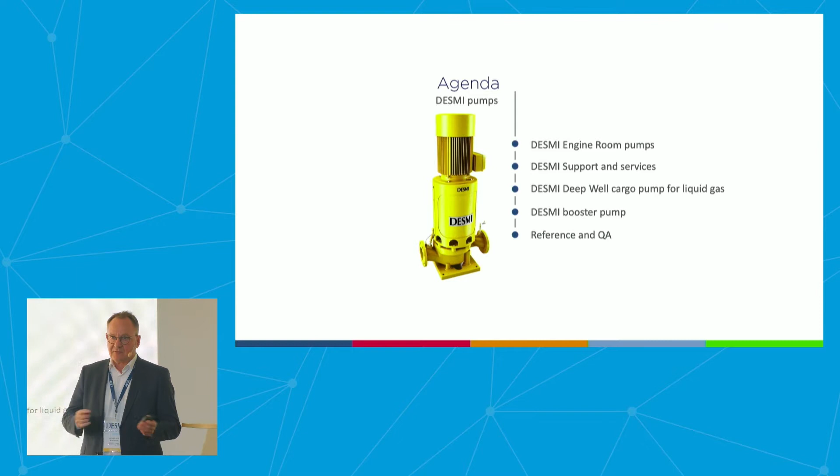Then we go into the deep well cargo system for liquid gases, and then a few slides concerning the booster pumps, which are closely associated with the cargo pumps.

DESMI is a company with a history of more than 185 years. They have been in the market in different segments and different areas. In the marine industry, they have been working within pumping or fluid technology for more than 50 years.

We have more than 100 pumps for different applications suitable for the engine room and related equipment. We supply complete pump packages to shipyards in Asia, Europe and many other places. We also do a lot of replacements and services and these kinds of things.

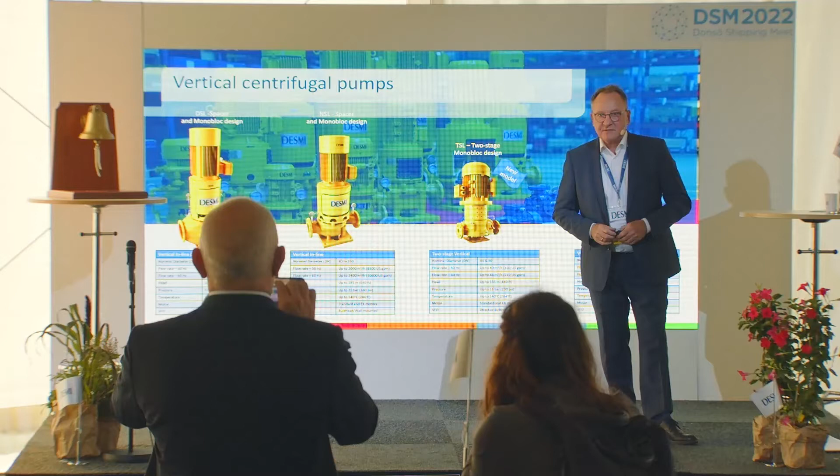This picture shows an overview of our vertical centrifugal pumps suitable for freshwater, seawater, scrubber installations and these kinds of things.

They can be supplied as a cast iron solution, in nickel aluminium, or also as a stainless steel solution.

We have on the left side the biggest, the DSL type, for heavy solutions up to 6,000 cubic meters per hour. Then we have the NSL pumps, medium to large size, which are also very often used for scrubber installations.

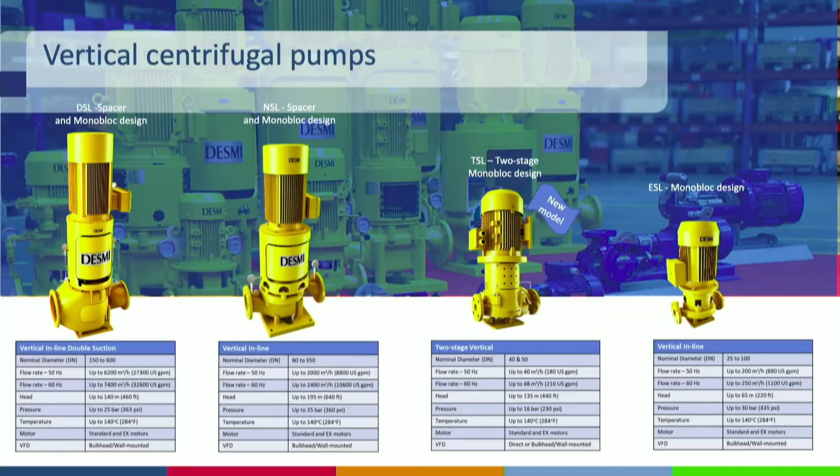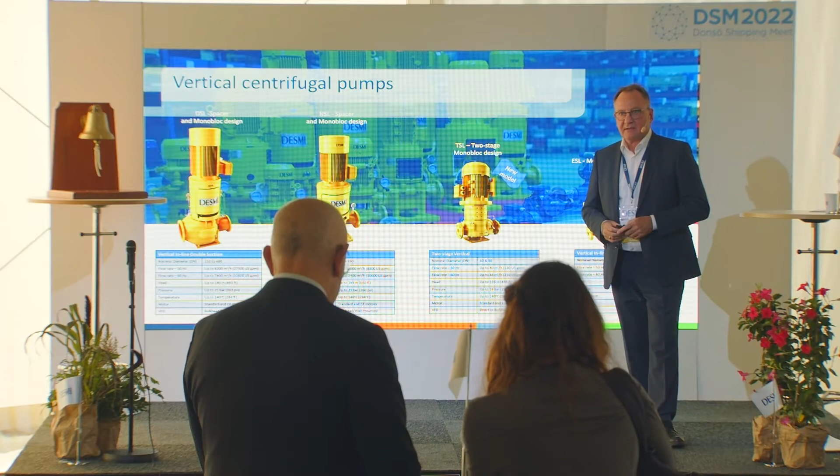One of the newest we have developed is the TSL type, a two-stage pump suitable for medium capacity with high lifting height requirements. The ESL is a more universal pump that can be used in many different applications for small to medium-sized pumping capacities.

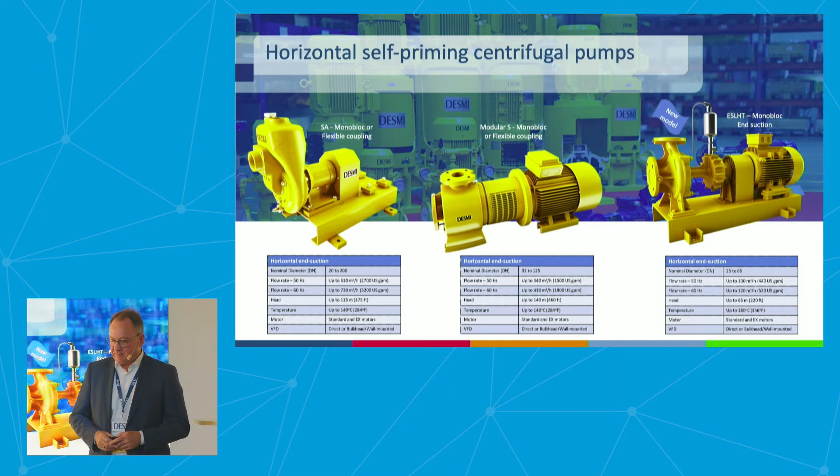The next one is the horizontal execution. The first, the SA type, is one of the oldest pumps we have in our product range. It has a very sturdy design with an open impeller and can be used for gray waters and these kinds of things without any difficulties.

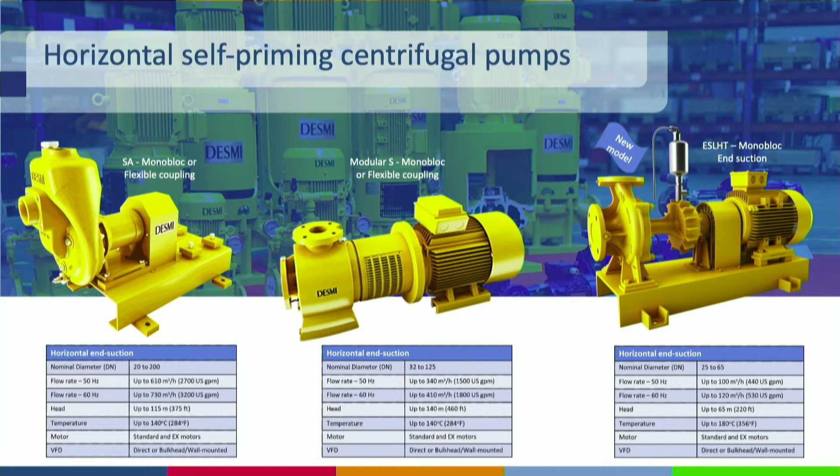Then we have the Modular S, and on the right side the newest solution in our product range: a high temperature centrifugal pump, specially designed for temperatures up to 180 degrees Celsius.

Very suitable for boiler circulation and these kinds of things, and given the requirements we see from shipyards in China and Korea, we expect this pump will be well received by the shipyards.

It's also a different execution compared to what we see in the market today, hence a more reliable pump than what the market is using today.

Coming to a difference, because everybody can supply a pump. It's not high sophisticated technology, and many pump manufacturers can supply a pump and a pump package which are in compliance with the shipyard specifications. The shipyard has absolutely no intentions to supply more than what is necessary and stated in the specification.

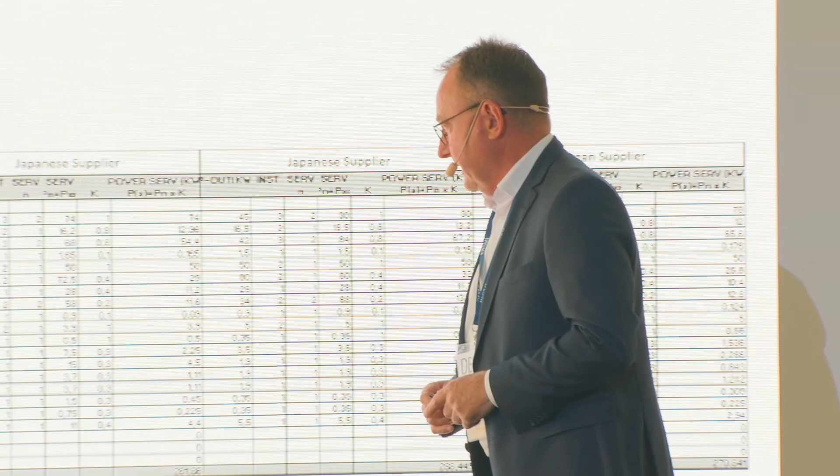On the left side is the duty power on the different pumps. We have the number of pumps installed, the number of pumps in service, and the kilowatt of the pumps in service, and the contingency factor, whether the pumps are running 100%, 80%, or 75%. It's actually showing that with this specification, we use 492 tons of fuel per year for operating the ship, on a constant base.

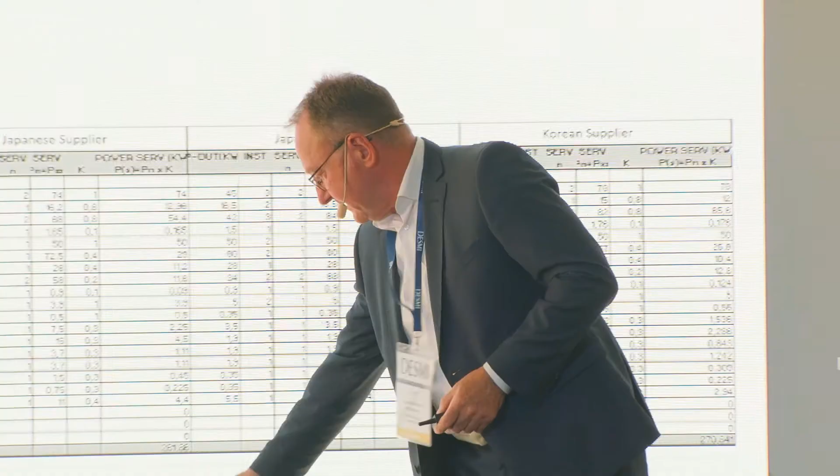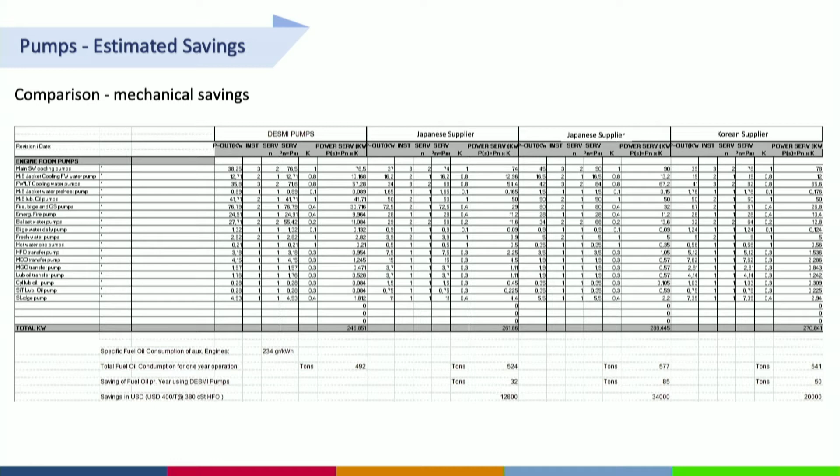But if you compare that with our calculation here against our competitors, the requirement is 32 tons less compared to the Japanese supplier, which is the next best, and then going up to 85 and 50 tons. If you turn that into money, you can see it's actually worth considering a closer discussion and closer cooperation at the design stage.

Then I will just show a short status of our latest development, where we are stepping outside the engine room. We are going to the cargo deck. DESMI has been in cargo pumps for many, many years, but 10 or 12 years ago, DESMI decided, for different reasons, to downgrade the cargo pump business and upgrade something else.

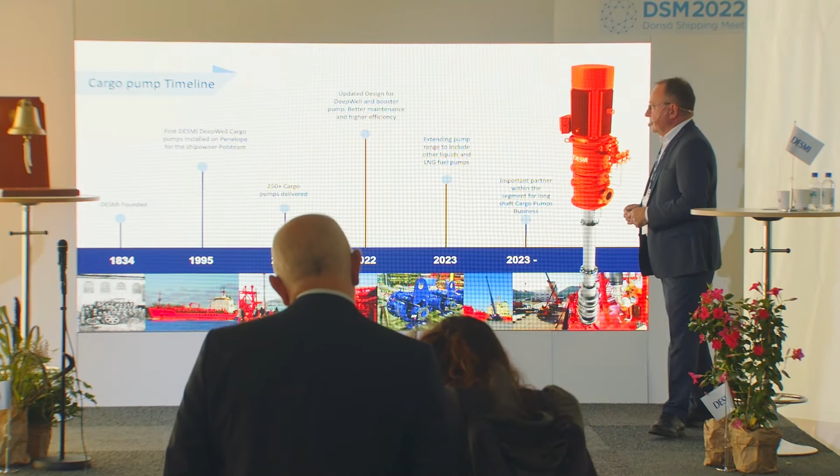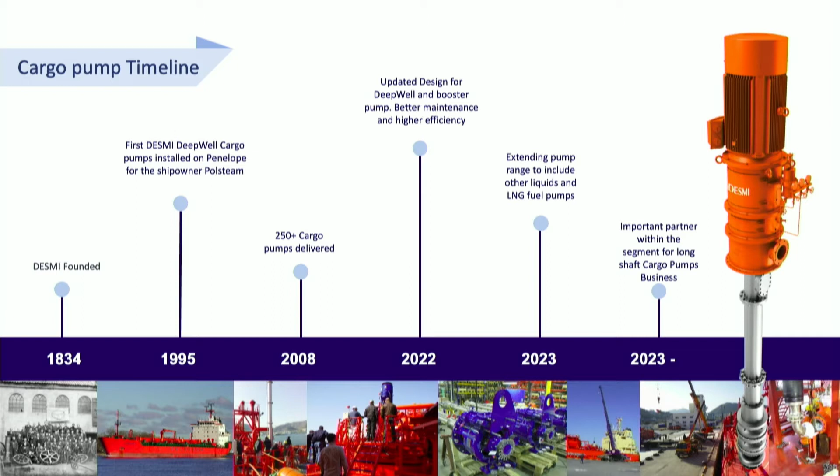But during last year, we decided to intensify the focus on cargo pumps, and we now have a new cargo pump program suitable for the LPG market. The first pump was delivered in 1995, and it is still in operation. I'll show you the reference when we get close to the final slide of this presentation. In total, we have supplied more than 250 cargo pumps.

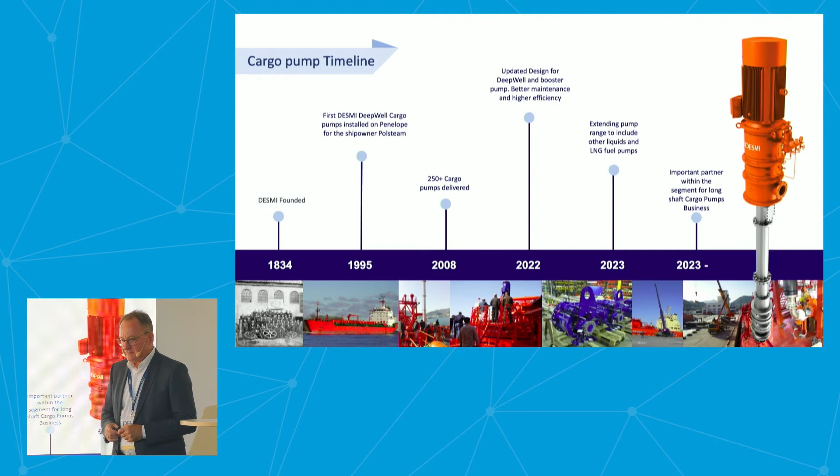Since last year and a half, we have done development on the existing design, utilizing and gaining the benefit from the operating references, and upgrading the design in close cooperation with a well-known service provider in the field. From next year, we will also step into other areas such as LNG as fuel and LNG as bunker pumps for bunker vessels. It is our intention and strategy to be an important partner in the cargo pumping industry going forward from this year.

The cargo pump itself, as you can see here, the orange part is from on deck, and the lower part is submerged into the tank. The production can be up to 800, or the capacity is up to 850 cubic meters per hour, and the lifting height is 160 meters. It can be used in any vessel with a tank pressure up to 18 bar.

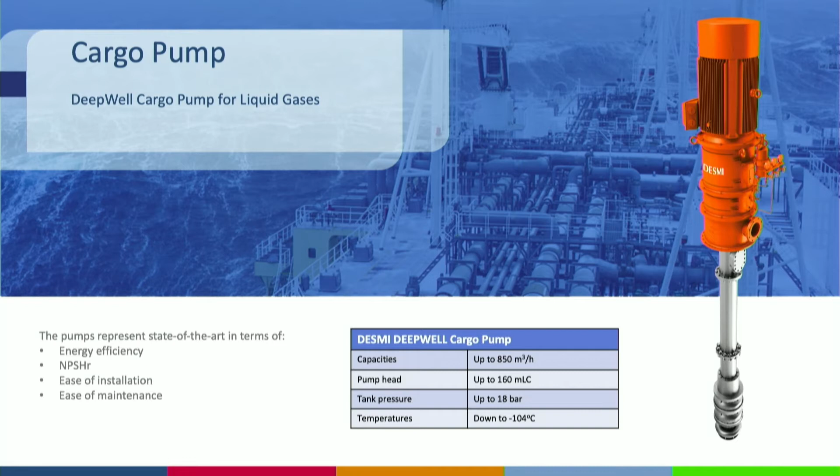So it can be a semi-refrigerated, fully pressurized, or non-pressurized installation. The temperature at this point, we are going down to minus 104. That means we have LPG, ethylene, and those kinds of cargoes in our customer base or range of products.

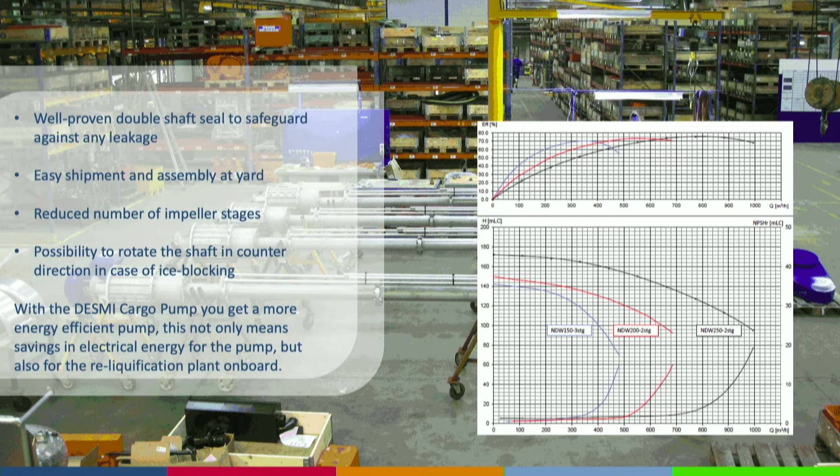The main difference between the old design and the new design: the old design was a welded solution. Here we have a casted solution, and if you do a casted solution, you can also improve the efficiency quite significantly, and hence also reduce the number of stages in the pump.

We can see the small one is a three-stage, and the others are two-stage pumps. If you compare that with the competitors in the field of services, we are at least one stage less compared to our competitors. Less stages means also less maintenance.

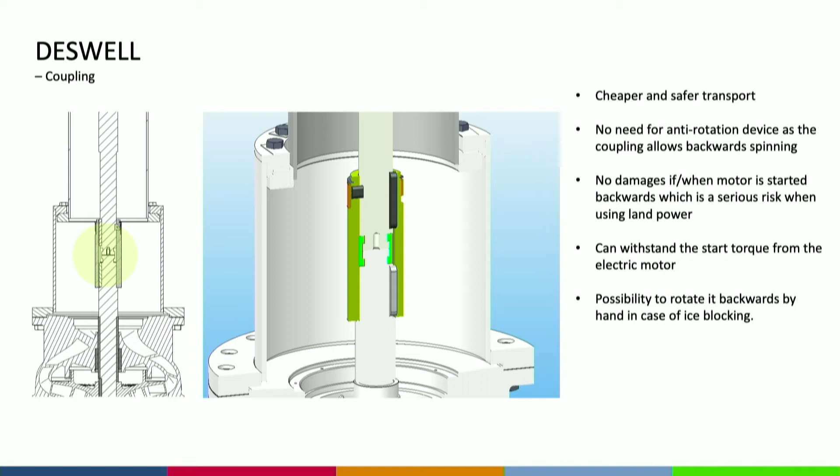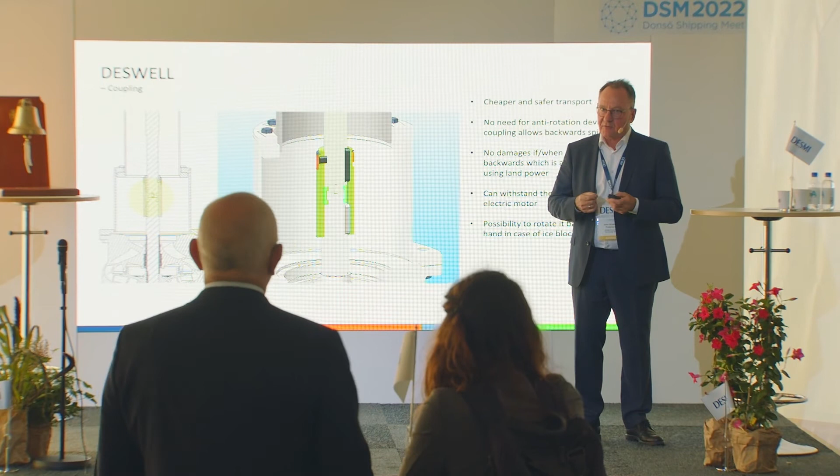Another area where we have spent quite a lot of time and discussion is whether or not we should go from the threaded design, which is well known in the market, to another design where we have a coupling that can actually rotate clockwise and anti-clockwise without having this anti-rotation device installed. It is good for the crew if, for example, there is ice in the pump and it is stuck, then you can actually rotate it both ways without any risk of extending the shaft because of the threaded solution.

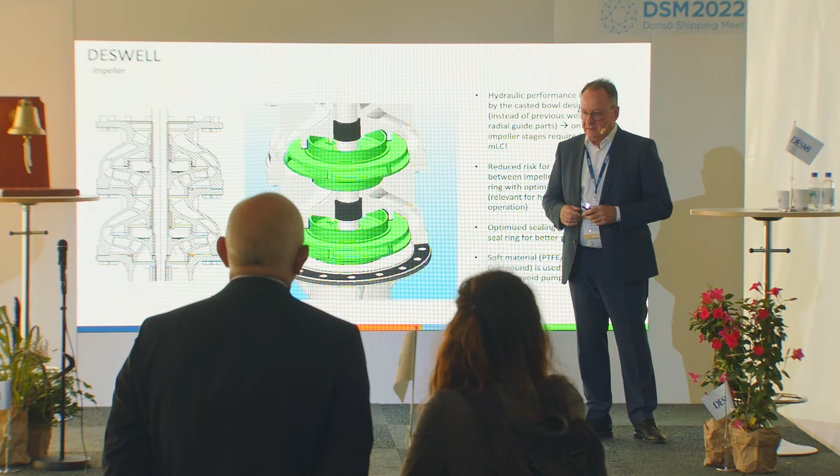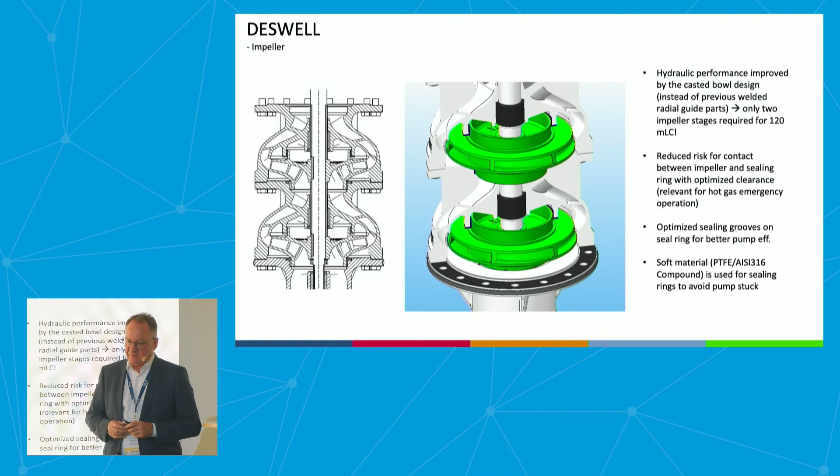As I said before, our stages, our pump has improved hydraulic performance through this casted design compared to the welded design, meaning fewer impellers, fewer stages compared to what the market is seeing today. We have also optimized the sealing, and we have done a number of things with the bowl inside in order to improve the efficiency. We have actually proved that the efficiency is above 80% at the duty points, which is very seldom seen for these kinds of pumps.

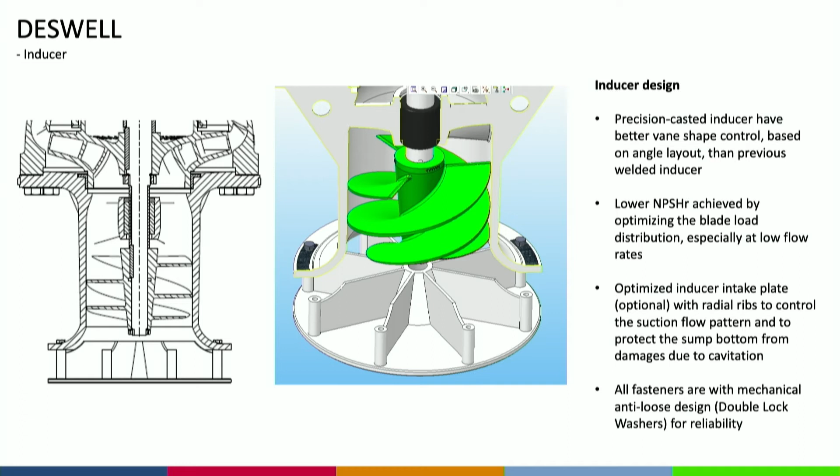At the bottom we have the inducer, and the inducer is important to empty the tank. We have spent a lot of time actually improving the NPSH value. We are pretty honest, we are not able to empty the tank with our pumps, and we will also claim that nobody is actually able to do it. But we have done a lot in order to improve the NPSH value, so the cargo left in the bottom of the tank is an absolute minimum compared to what our competitors are doing.

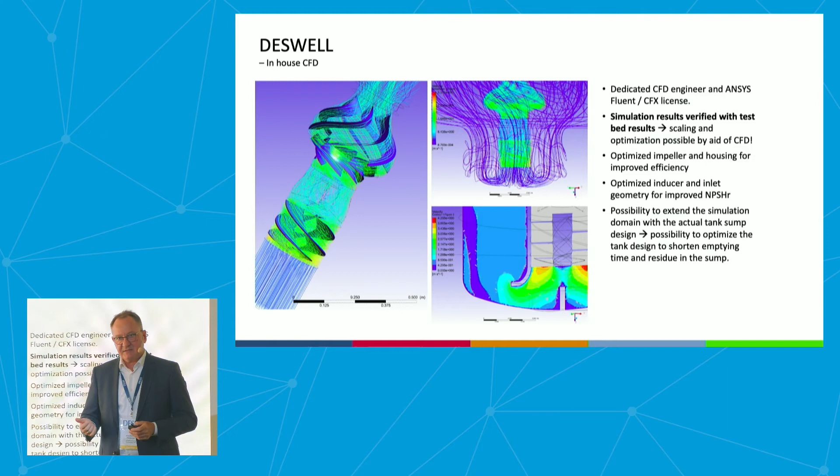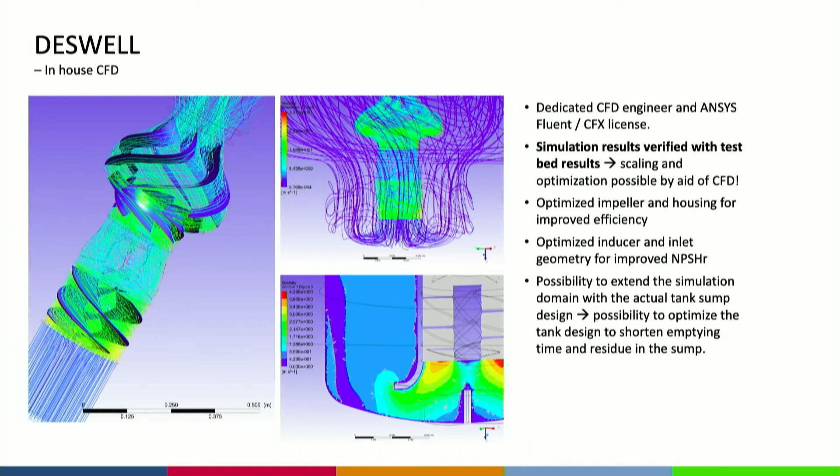Through our dedicated and long experience in the centrifugal business, in the fluid business, we have a lot of tools, and we have spent a lot of time with our CFDs. Through these CFDs, we have proven our pumps are actually 6 to 8% better performing than the CFD predicted. So we have also tested the pumps from, let's say, the computer into the real world, and it is actually better than what we designed them for.

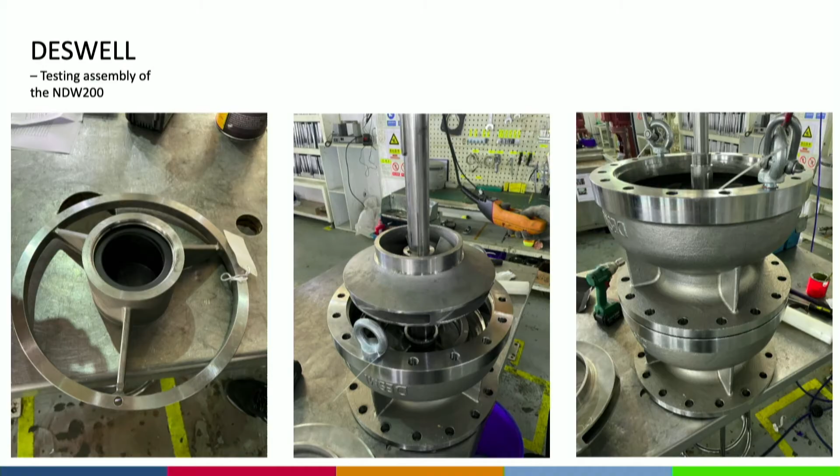Here you will see our NDW 200, which is being manufactured in our facility in Suzhou, China. It has been capacity tested. We are now doing the NPSH test again in order to be absolutely sure that our data is correct.

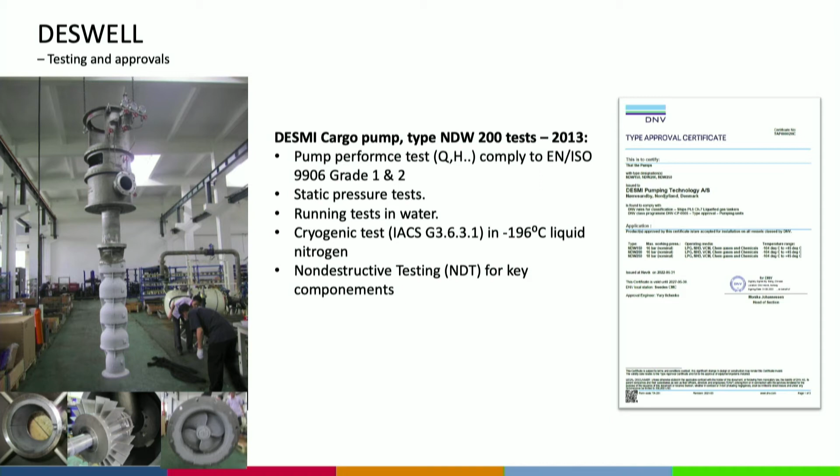We have also now received the type approvals from DNV on the new pumps. We have done a cold test where we tested the pump in nitrogen down to minus 196 degrees, checking the possibility to rotate the equipment even at lower temperatures as low as 196. So we are absolutely sure that we have a product which serves the market as we see today and going forward, with a high quality pump without any risk of breakdown or other unforeseen things.

Finally, we also have our booster pump, which is a necessity for the cargo operation. The booster pump is also a casted solution, and it's also upgraded compared to what we supplied 10 years ago.

Through inspection from a Danish company called Nordan, who has been developing and supporting us with excellent field information, they were on board in June 2021 for a regular inspection, and there was absolutely nothing wrong. Everything was in very good condition, except a mechanical seal on the booster pump had to be exchanged. Apart from that, nothing was actually necessary.